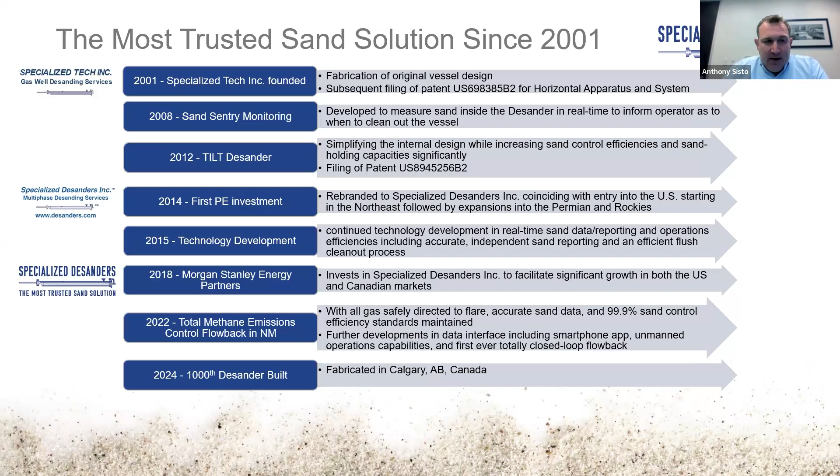I tell people we're a technology company, we're an engineering company, and the problem we've chosen to solve is sand production during flowback, initial production, and really throughout the life of oil and gas wells. So I thought I'd start by kind of defining the problem, which is sand production at various phases throughout the life of the well. So looking at some of those phases, we have flowback, which can be characterized as the first maybe 6 weeks to 6 months that the well is turned into production.

That can be characterized by higher sand rates for sure, anywhere between 15 and 1,500 pounds per hour. Total amounts of sand could be upwards of 75,000. We've actually seen more than that here in the recent past. And really, it's a matter of what's the well going to bring to surface, and you really don't know until you get going, and a lot of it is dependent on how things are managed on location. So that sand production can be characterized as semi-consistent. You can sort of know what to expect, but it is going to be unpredictable in some capacity as well.

During that phase, there's a potential for damaged flowback iron, sand-related shut-ins, which can be very detrimental to the productivity long-term of your oil and gas wells. If you're not able to get up to rate and clean up that well in that first initial production phase, then a lot of times that cleanup will be inefficient and production will suffer long-term. Ability to achieve those target rates and for that well to perform the way reservoir and production engineering would design can be hindered by sand production unless you have means of managing it at the surface during that phase.

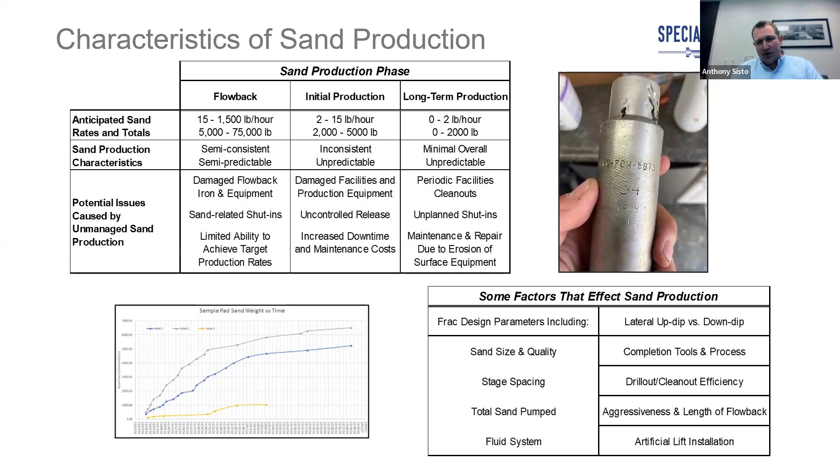And then whenever artificial lift is installed, changing downhole dynamics, lowering bottom hole pressures, different cycling or other artificial lift mechanisms can destabilize sand that's in the formation or in the lateral, and you start all over in a way with sand production that starts to come to surface later in the life of the well. So anytime anything changes, or if a well's shut in for an extended period of time and then brought back into service, then now you have another chance for sand to cause an issue and come up the well bore.

Let's get that here. So looking at various sand control equipment and technologies that are on the market, obviously this is an evolving space like every other technology space in the industry. But the initial way to handle sand was with a vertical sand separator, traditionally an impingement style where there was a plate inside. A lot of these were built early on in the industry with frac sand or with formation sand, and they were notoriously inefficient, talking about maybe 50 or 65% efficiencies.

The industry has gone to more of a cyclonic function that uses a differential pressure to spin the sand basically out of the fluid, push it to the wall of the unit where it then falls. That can be more efficient, maybe upwards of 80%. That space continues to get more and more advanced, and companies are pushing the boundaries of what they're able to do there. That being said, the vessel itself looks similar in that it's in a vertical orientation.

Some vessels on the market are spherical. This can be a benefit in that they maybe hold more sand, they have higher sand holding volumes. They both blow down on the fly, meaning while the well is flowing, you're going to be flowing that well to an open top tank that would evacuate the vessel as much as they can, and then on the fly that sand is taken out of the flow stream.

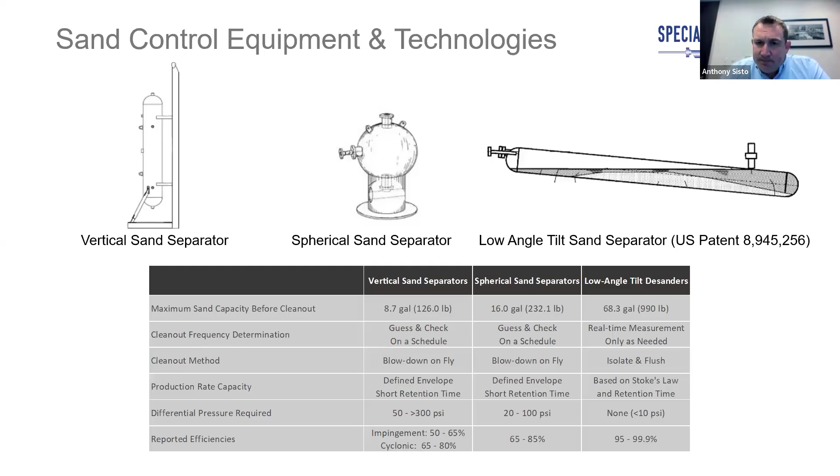So I mentioned earlier that verticals and sphericals blow down on the fly. Horizontal desanders and low angle tilt desanders do not. That's because once the sand settles, it wants to stay where it is, and there's not enough energy to move it with simple surging of the vessel.

So what we do to clean out the vessel is isolate it. We swap the flow into a bypass unit, typically on location, and then we isolate it, bleed off the pressure, and use a pump to sweep the sand out with high rates of produced fluid. So that's the clean out process, and it's done, like I said, only as needed because we are measuring how full the unit is in real time.

Trying to advance my slide here.

Here we go. So I mentioned the mechanism to separate sand is gravity. So how do we get gravity to work inside of the vessel? So I liken it to whitewater rapids versus a wider, deeper stream where you can see the bottom. Inside of the piping, you have gas and liquid and sand all combined into one flow at the speed of the gas. So in whitewater, it's white because there's air entrained in the fluid. This is comparable to in the pipe where gas is entrained in the liquid.

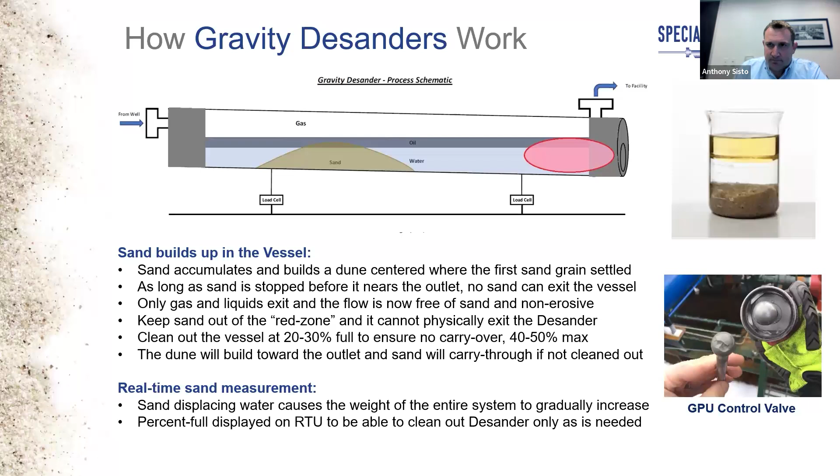Talking a little bit more about the data, we are measuring and recording the weight of the desander and the fluids and sand inside in real time. That weight difference I talked about is put onto the iPhone app or website, where you can see how full each of the units that you have in service are, and that determines when they need to be cleaned out.

This is particularly important post flowback when there might not be dedicated manpower on location, people managing the field in the area, but not necessarily sitting there or scheduling a time to go over and manage that site. So this gives real-time information for the people that are operating the vessels to know this desander needs to be cleaned out today. This desander is getting full. We don't need to worry about maybe this side of the field as far as sand control is concerned today because these units are filling up slowly and we know we have that additional capacity.

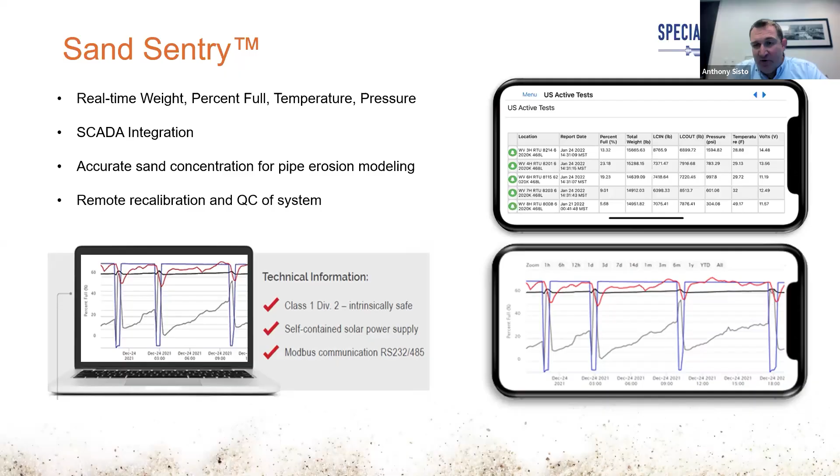With that, we were able to notify the E&P company that they were taking a frac hit at that time. We do have alarms set on our sand sentry so that if we do see spikes or increased activity, we do get an alarm, which then we can pass on to our partner on location so that they can look into it further.

Absolutely. In the cases where some sand slugs come and overwhelm the vessels or start to fill up the vessel very quickly, we can respond very quickly as well. And the good thing is that our capacity being, like I mentioned, 500 to maybe 1,000 pounds of sand before the unit starts to carry over means that in these cases where you see quick increases in the percent full number, our vessels are equipped and capable of handling those sand slugs, and the client gets notified so that they don't go out 2 or 3 hours later realizing that their vessel's been overwhelmed and there's been sand carrying through the facility all along, and they were totally unaware.

So this also gives us the opportunity to quantify the sand that's being produced. When we do a clean out, you see the unit here at about 30% full. The vessel is depressured and flushed and then returned back to production. This weight difference before and after the cleanout can be attributed directly to sand that was in the vessel, sand that was then removed from the vessel. Being that the cleanout takes place over a 15 or 20-minute period of time, all else is the same: pressure, rate, temperature, all the other variables are isolated. The only difference is the weight before and the weight after.

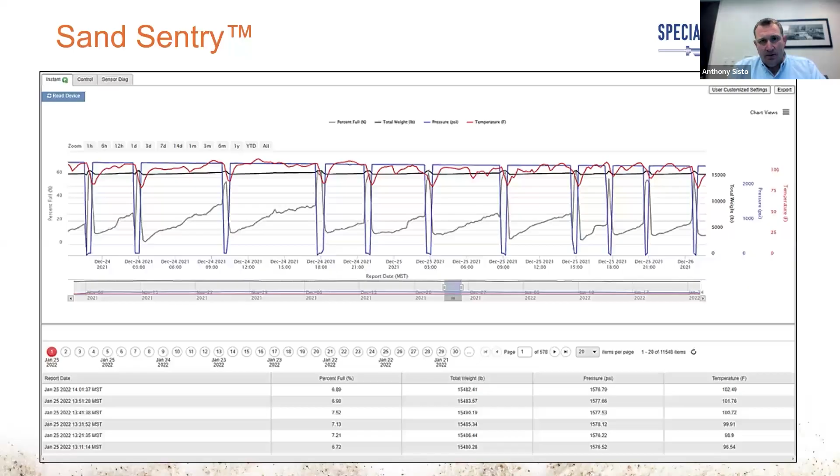So this really is the most accurate sand quantification on the market, in that before and after that clean out, we know the before weight and after weight, and being able to make calculations at that point puts a very accurate number on what the well is producing in that period of time.

So by accumulating that data, by aggregating it, and reporting out a cumulative sand production plot, you can start to see the shape of sand production. You start to see trends, type curves, and different ways that different wells are bringing sand to surface. It allows us to do some predictive modeling, compare to previous jobs that we've done, profile wells by sand production, and then at the end of the day, know with confidence that the well is cleaned up and flowback can be ended.

So a lot of times our data will tell the client flowback's over, it's time to move on to the next job, or unpredictably, maybe the flowback's going to last a little bit longer than they were expecting. But knowing that there's a valid reason to continue to spend that money to keep flowback out there or to keep sand control on location means that they're preventing much bigger issues if they were to end flowback prematurely and allow sand production to go through the facility, really starting to cause more critical issues that could stand in the way of the well continuing to produce.

So these sand reports are provided in real time, on demand, on the website, and clients can start to see, how is my well performing as it pertains to cleaning up significantly enough to release flowback, or in conjunction with different things that were changed on the frac, different completions methods, downhole tools, other variables. You can now start to see how those decisions affect sand production and flowback, and ultimately the cost to bring the well in line.

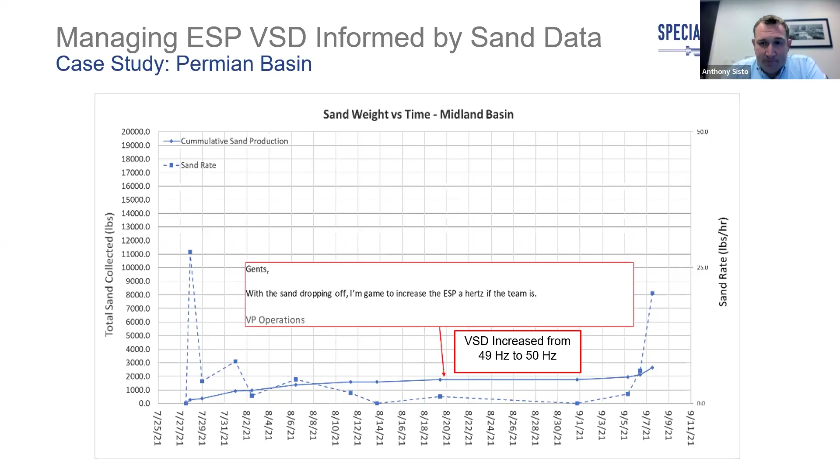In doing so, they could see that going from 49 to 50 hertz really had no effect on sand coming to surface. The VP of operations made the call: we're turning this up, and we're not seeing sand really affected. So let's go ahead and increase production and increase the pump downhole. When they went from 50 to 51 hertz, everything changed. So you can see immediately they started to bring sand to surface. They took 2 sizable sand slugs, both of which were caught in the Desander with no interruption to operations or production.

And from that point forward, they were able to let that sand subside and continue with increasing the VSD until they were able to get to 53 hertz, where when they turned it up, they saw a slight increase in sand production, but that quickly leveled out. And they knew at that point we're at the production rates we want to be at. You know, we've gotten the information we need to know and have confidence in the fact that this rate is not going to produce sand.

So that Desander got moved on to another project, and the client could move forward without any sand control, comfortable that the rates at which they were producing were going to be effective, and that there wouldn't be any damage to facilities or anything unexpected in the way of sand production for the remainder of that project.

And then talking a little bit about emissions, one thing I mentioned is that slight angle tilt or horizontal desanders do not blow down on the fly. And that gives us a lot of options. So in cleaning out the desander, it is isolated from the well during that process. And in doing so, we have about a barrel of trapped gas to manage. So having that situation means that we can take that barrel of gas and we can direct it to a number of different processes. Some clients elect to depressure it to atmosphere.

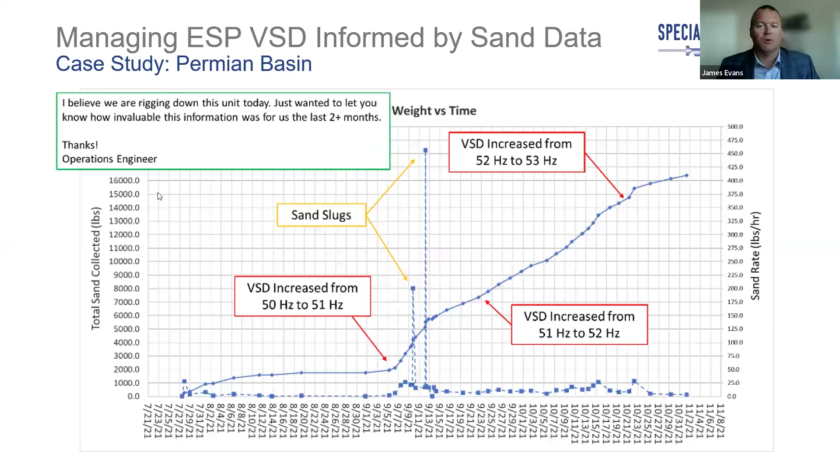Are there selection parameters of desanders? Yes. Typically what we do is we try to get your flowing parameters, and then we put them into our in-house computer program to determine which size of desander would be the most efficient for your application. So typically what we're looking for is shut-in pressure to make sure we meet those standards. And then we look at worst case scenario, your highest flowing rates, liquid and gas, with your lowest pressures. That would typically give us the worst case conditions, and then we can put that into our program and see which desander would be the most effective.

Absolutely. And the great part about that is that we know before we go. The worst thing is to put out a piece of equipment, hoping it works. And when it doesn't, well, what do we do? Do we get another one? Do I need a different one? All of that is wasted time, movement, and money. So with our performance modeling and being able to use physics to predict the efficiency of our vessel, we can tell clients, look, one unit's not going to handle it, you need to split the flow, before that job happens. But those are extreme cases.

In the vast majority of cases, we have big enough, long enough, higher pressure rated enough units to meet certainly every well in the Permian Basin and most other basins as well. Going up to 10K for some applications, 10,000 PSI. Yes, we have many different sizes of desanders, as I mentioned earlier in the session. The first desander was 8 inches by 10 feet long, and now we go up to 24 inches, 20 feet long, with pressure ranges 1440 all the way up to 10K. And we have custom built some desanders for clients in the past as well, to make sure that we do fit the client's needs.

So we have another question about the zero emissions part. How do you ensure that it's zero emissions? Okay. So I'll get to that slide here. Sorry. So ensuring that it's zero emissions really is fundamental to the process that you're using. So the well's flowing through our desander. That's a closed system.

Downstream of the desander, it's flowing to facilities and flowing to separators and all of that. Operators have zero emissions into that system, as evidenced by the VRU that takes the vapors off of that tank and puts it into the pipeline. Our process only requires that a barrel of gas be directed during our clean out process.

So verticals and sphericals blowing down on the fly, that means you're opening a valve, you're flowing the well directly to a vessel, which in most cases is an open top gas buster tank, or some vessel of sorts that needs to have a pop off on it or a flare, because you have the risk of well pressures hitting that system. You don't have the risk of well pressures hitting our system uncontrolled.

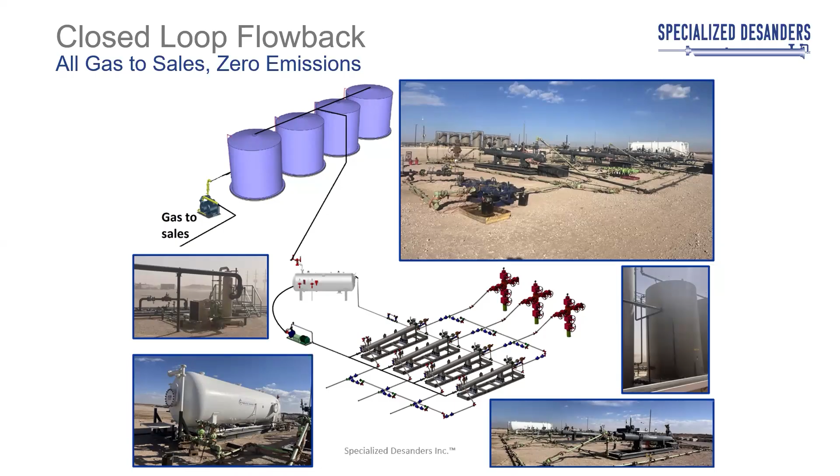That's awesome. Now, a question I had was, with the sand volumes, you get different particle sizes, and that can vary significantly. How does your system adapt to the fluctuating sand loads without compromising the performance? Sure. It's a great question. Typically, when we meet with the client ahead of time, we try to find out what size of sand they are anticipating to come back.

So if we're finding that the sand particle is coming in a lot smaller than we anticipated, it will flag it in the program so that we can adjust and possibly send a bigger desander out before the job even starts. And we have been on other jobs where the client is expecting 100 mesh or 150 micron sand, but yet we know that the sand does get pumped in at high pressures and it does crush. So we have seen it where we're getting 100 mesh, but we're also getting a lot smaller particles caught in the desander as well. So sometimes we do particle analysis to see what we are catching to provide to the client.

Yes, absolutely. And like James said, we're going to assume the smallest particle size in our pre-job performance modeling. And so larger sand is going to settle out faster than that. So we do take the worst case scenario when it comes to the smallest particle size. When we design the job, we also look for a cutoff of about 50 or 60% of the way through the desander. We don't design jobs where the sand is falling out close to the outlet. That gives us that additional level of safety.

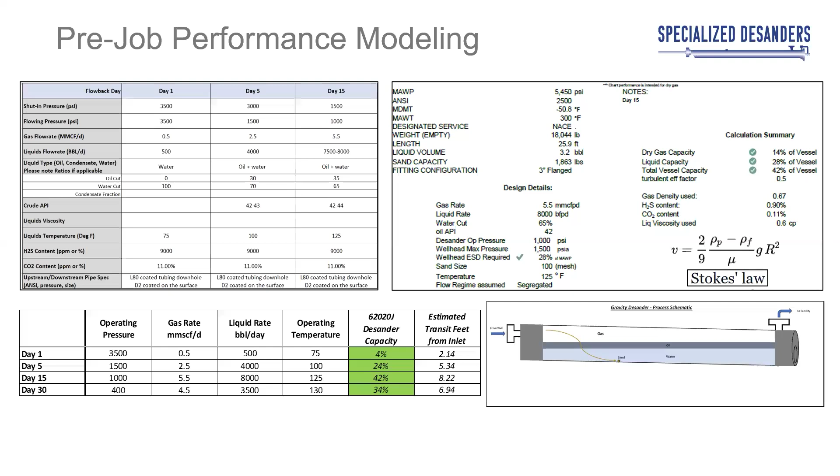Perfect. And another question about keeping track of everything. So do these units have a built-in monitoring system or digital integration of some sort? Yeah, so we do have our own monitoring system. The Sand Sentry system I talked about, where all of the calculations are done on site. They're solar powered and all self-contained and intrinsically safe. We can export that data to SCADA and tie it into operator SCADA systems. It's also put up onto a secure website that the operator can access. The iPhone or smartphone app is also somewhere that you can monitor that data.

So as we're collecting it, doing our calculations, analyzing that data, doing reporting, things of that nature, it's all contained there on our website. But then the raw data itself can be exported to SCADA, and some of that can be recreated for the client to do it directly into their system, tracking it alongside different production curves and other bits of information that they want to correlate. So hope that answers the question. But as far as connectivity, like I said, it's typically beamed up via cell modem. We do have SAT modem capabilities or direct tie-in to SCADA on site into the client's data acquisition projects.

Awesome. Last but not least, we were hoping to get a little bit of an inside scoop for the Permian Tech Talk. What advancements are you currently working on to further improve desanding efficiency or adapt to emerging ESG regulations in oil and gas? Yeah, oh, go ahead, James. You can take that. Sorry, Anthony, I'd cut you off there.

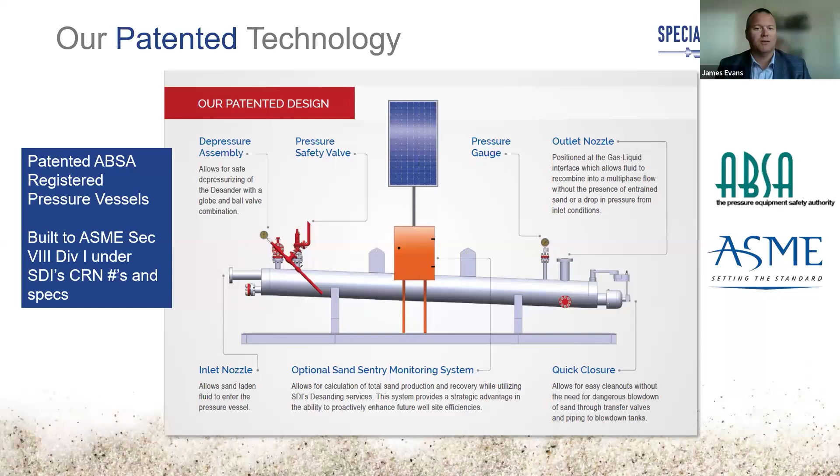As we continue to work in one of the most challenging but exciting basins, the Permian, we continue to develop new products. We are currently working on some other sand measurement detection devices internally. And then as the world continues to take on and develop AI, we are working on some in-house programs with AI. So maybe one day we can predict how much sand your well is actually going to be producing. But those are some of the exciting things that we're working on currently, hopefully to be released possibly later this year or even into early next year with some of our new products.